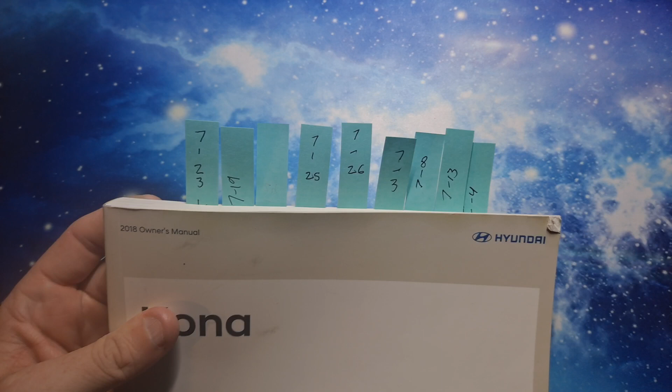So engine coolant, which everybody tells me they can't find anything about, actually has a lot of pages. Some of these are diagrams. Some of these are specifications for when you actually need to change it, and under what conditions, between both engines.

Now, this is for the US, so refer to your manual in your country for your vehicle. That's important. And just about everybody has one.

If you don't have one, you can go to a dealership and get them for free. Most places, at least in the US, you could usually get it for free. Or even Amazon sells them. They range between, I think, $15 to $45, depending on the model. I think that's just because of how rare some of them are, like the 1.0s. There's one in there for the 1.0 for $55. I think it was the highest I've seen, but it's few and far between anywhere near that range.

So today we are going to talk about coolant. So let's take a look.

All right, step one is to open up the back of the book and look for the index. It starts on like I2. So we're going to look for coolant, which I have marked here. I4 is the actual page I have to go to, which is this one.

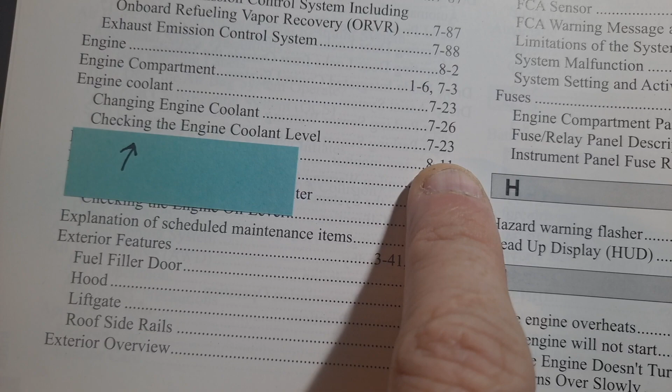Engine coolant on page 7-3. Changing engine coolant on 726. And checking engine coolant level, 723. But that's only 3 pages, and I have 8, 9 tabs? So there must be more involved.

So let's take a look. I'll start in the front and work our way back. Let's see, what's the first one here? I think 7.3 is the first one. Yes, 7.3 is the diagram of the engine compartment.

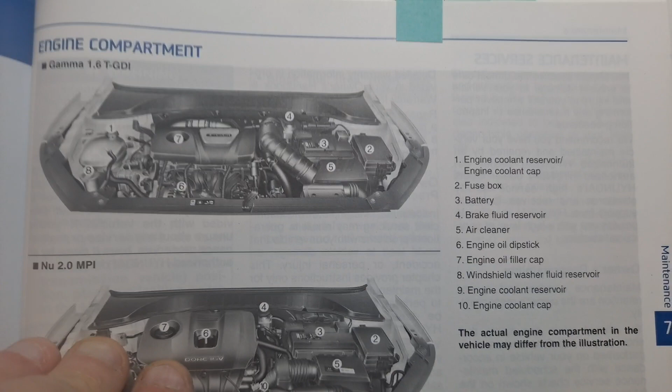Sorry, I'm shaking. The reason I am not a surgeon. Engine compartment on the 1.6. Your coolant reservoir is right there. It says, number 1, engine coolant reservoir and engine coolant cap.

But you notice strangely enough, on the 2.0, number 1 isn't there at all. Because number 9 is the engine coolant reservoir.

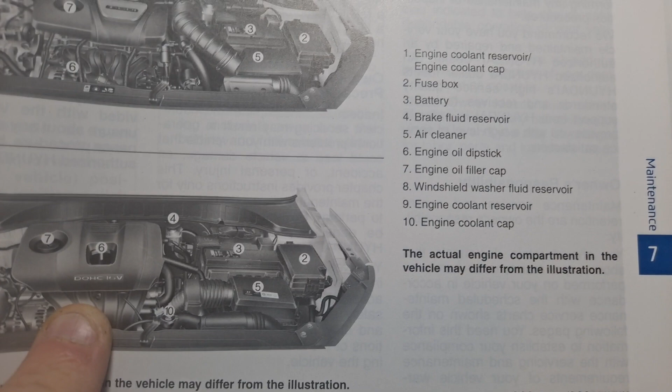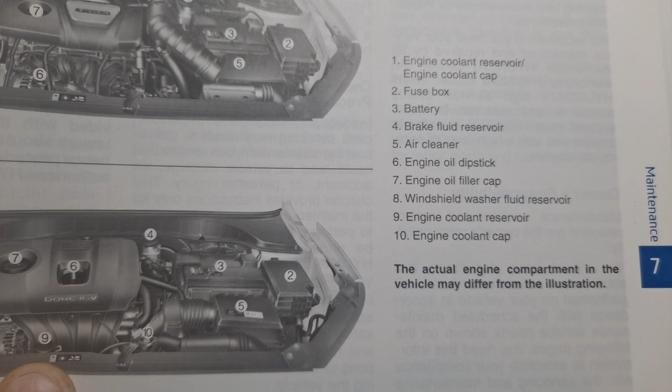So this is where it gets interesting. Number 1 is a reservoir, but it's got a line going in and a line coming out, and a pressurized cap. Where the 2.0 has a radiator cap on the top radiator hose. And number 9, even though it says engine coolant reservoir, is actually an overflow jug or overflow tank.

So this one's got some special requirements, and everybody that has the 2.0 struggles to figure this out. But I will explain. All right.

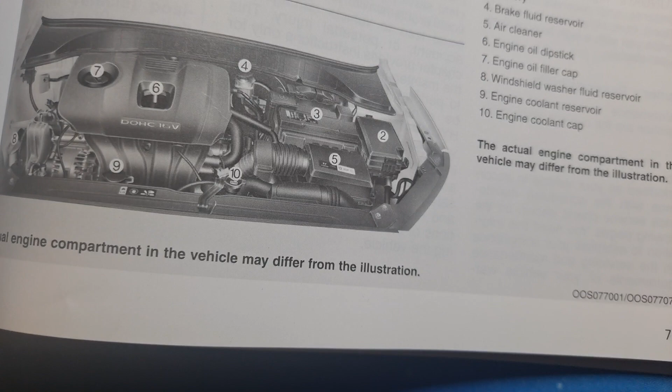So let's see, 719 looks like it's going to be the next page. What do we have here? Oop, 19, where's 19? Oop, I got even more here. Sorry, apparently I was not prepared for this.

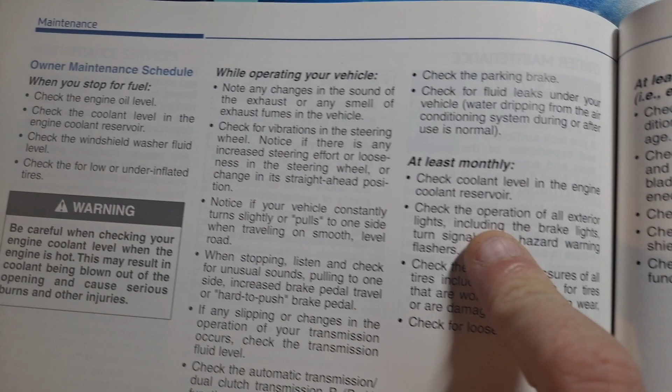They recommend for regular maintenance, at least monthly, check coolant level in the engine coolant reservoir. So you're supposed to check it every month. Do people do that? No.

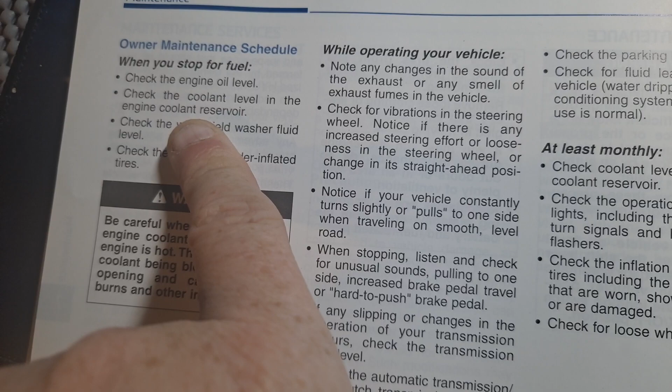They also recommend in the owner's regular manual, when you stop for fuel, check the coolant level in the engine coolant reservoir. I know nobody does that. Not even me. And I check my vehicle every time I do an oil change. I go through and check every little item. So here's that. I really should put these in order, but I guess I didn't do that this time.

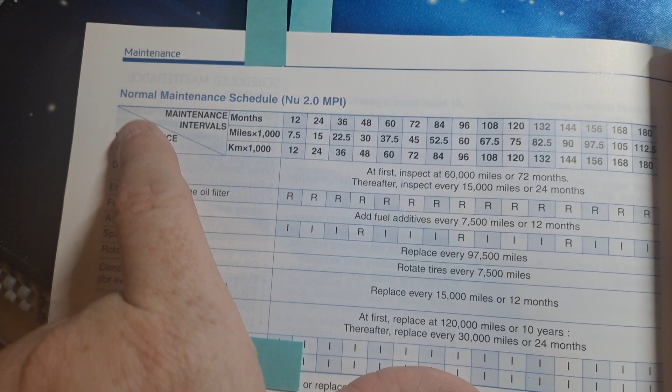All right, so we'll start off with the maintenance schedule. Normal maintenance schedule for the 2.0. Engine coolant: at first, replace at 120,000 miles or 10 years. Thereafter, replace every 30,000 miles or 24 months. That means whatever comes first. So 120,000 miles on your coolant.

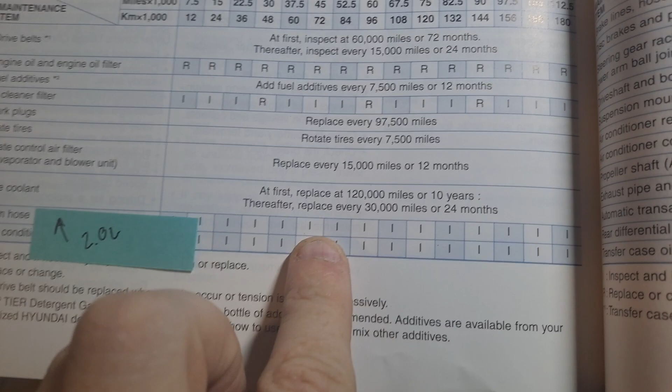That's crazy. I check mine every year. Actually, I change mine every year. But again, I'm modified and I have the 1.6, so this doesn't apply to me.

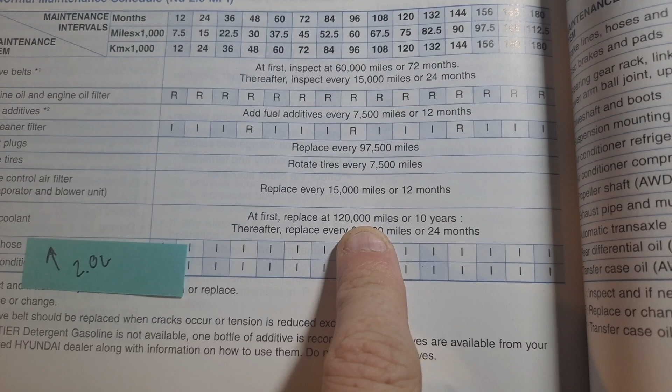So that's interesting. 120,000 miles or 10 years, whichever comes first. So if you did 120,000 miles in the first 8 months of ownership, then I'd have to change it. But I would never go to 120,000 miles because by then it's probably pretty cruddy.

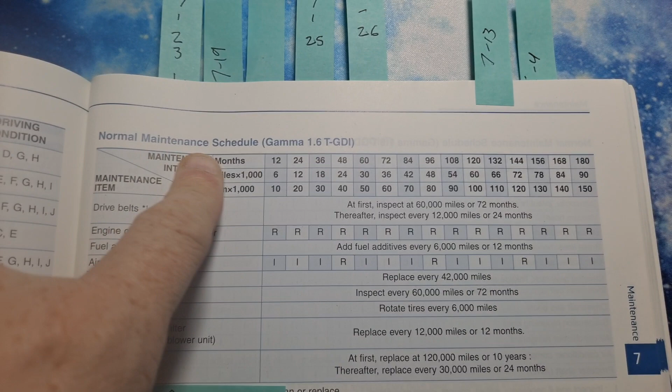All right, so that's on the 2.0. Now on the 1.6, normal maintenance schedule, gamma 1.6. Engine coolant's way down here now. At first, replace at 120,000 miles or 10 years. Thereafter, replace every 30,000 miles or 24 months. Same thing as the 2.0.

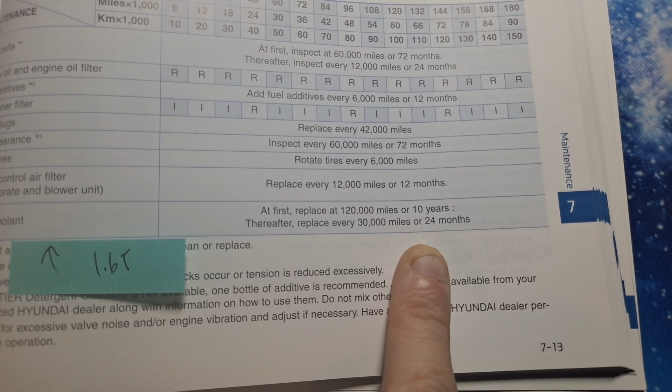Do I recommend it? No, because you have a turbo, and the turbo is both oil-cooled and engine coolant cooled, like radiator fluid cooled. Because of the turbo, it's going to be going through a lot more cycles of hot and cold. I would recommend changing much sooner than that, but that's just me.

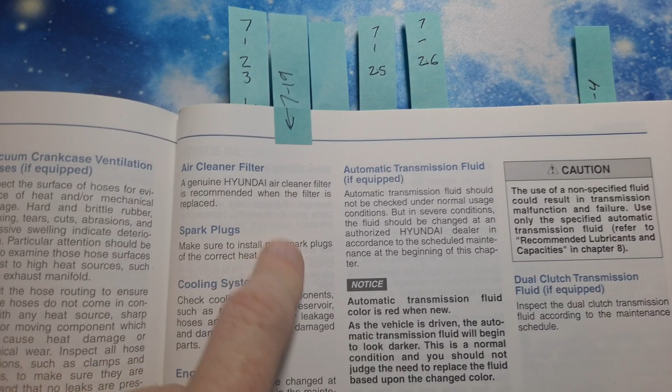All right, let's see what's next. 719, cooling system. Check coolant system components such as the radiator, coolant reservoir, hoses, and connections for leakage and damage. Replace any damaged parts. So this is in regards to explanation of scheduled maintenance items.

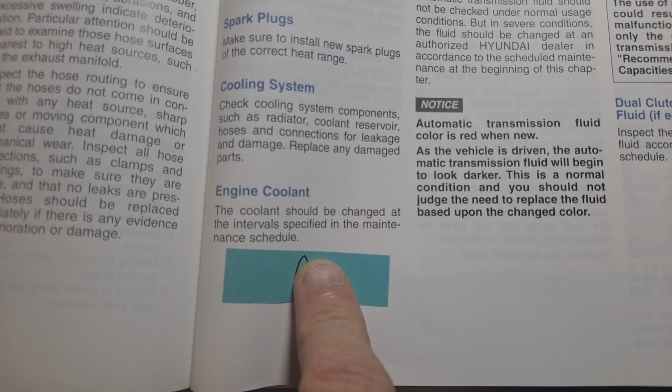And engine coolant. The coolant should be changed at the interval specified in the maintenance schedule, so 120,000 miles or 10 years. And then, how you go after that. Next page. Let's see here. Here we go, 724. Do I have a 720? Oh, here we go, 723.

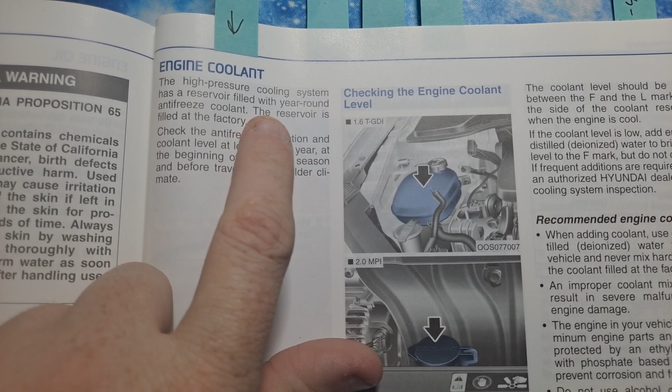Engine coolant. The high pressure cooling system has a reservoir filled year-round with antifreeze coolant. The reservoir is filled at the factory. Check the antifreeze protection and coolant level at least once a year at the beginning of the winter season and before traveling to a colder climate.

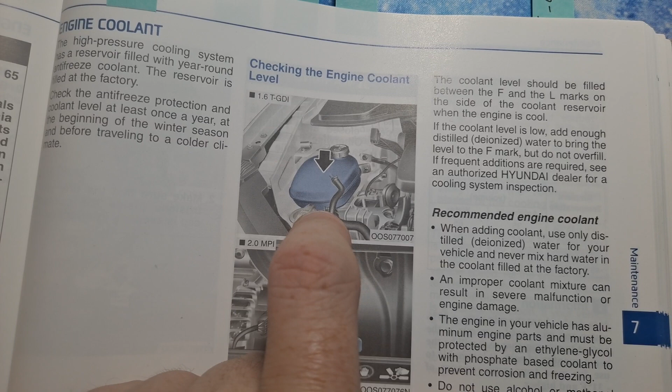Checking the engine coolant level. On the 1.6, there'll be a minimum and maximum, or a low and high mark in it. Mine's not there because I have a different kind of tank. I use a swirl tank in my car, so I cannot show you a picture of it, my apologies. On the 2.0, there's this little cap here that kind of looks like a washer reservoir, but it's not.

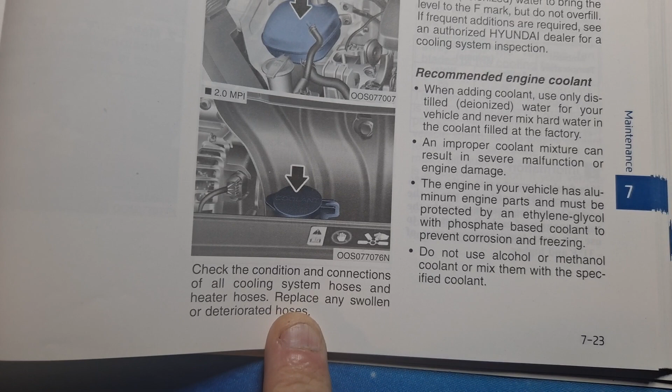It's your coolant. So check the conditions and connections of all cooling system hoses and heater hoses. Replace any swollen or deteriorated hoses. The coolant level should be filled between the F and the L, full and low, marks on the side of the coolant reservoir when the engine is cool, not hot. Hot can possibly burn you, and you do not want to do that because it is pressurized.

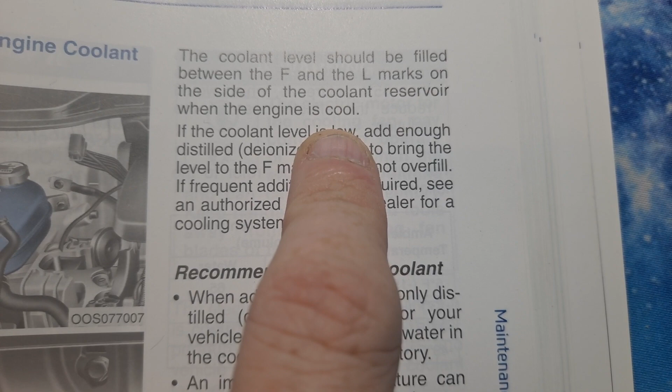On the 1.6 it's at least in that container. The 2.0 is at the reservoir cap, the radiator cap. You'll notice the caps are quite a bit different because this on a 2.0 is not a pressurized cap. The radiator cap on the 2.0 is separate. It's on the top hose, top radiator hose.

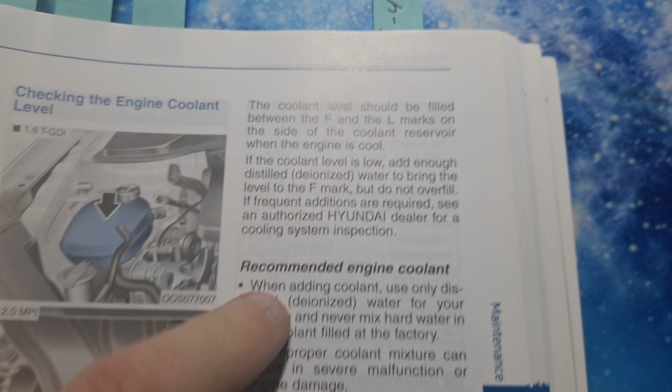If the coolant level is low, add enough distilled, deionized water to bring the level to the F mark, which means full. Do not overfill. If frequent additions are required, see your Hyundai dealership for a cooling system inspection.

Distilled, not regular water, but distilled. Deionized is the same thing. Distilled water is pre-boiled.

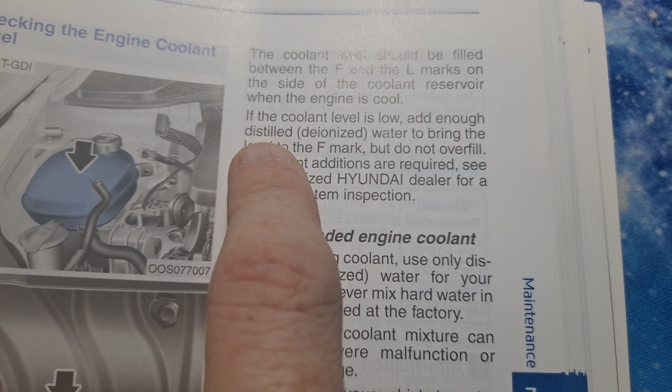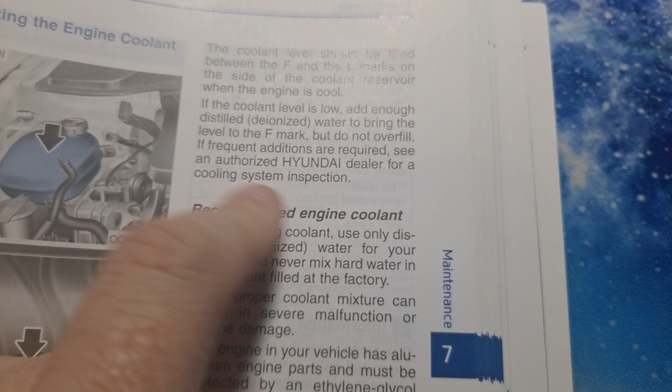So what does that mean? Water boils at 212 degrees Fahrenheit. But water also contains minerals - calcium, magnesium, phosphorus - there's actually a bunch of other stuff, and I can't remember what they all are off the top of my head. When you distill water, you're purifying it by boiling it. When you boil it, it condenses, turns into a vapor, and condenses into another container, leaving all the minerals behind. So you don't want the minerals in your cooling system because it wears things out, especially plastic parts.

So distilled, that's those weird gallon bottles you find at a supermarket for like 99 cents on the bottom shelf that you're not supposed to drink. Well, this is what it's for. They use them in batteries and in cooling systems.

There are other options to this, which are cost prohibitive for most people and more labor intensive, like Evans waterless coolant. That's what I use. That has no water in it.

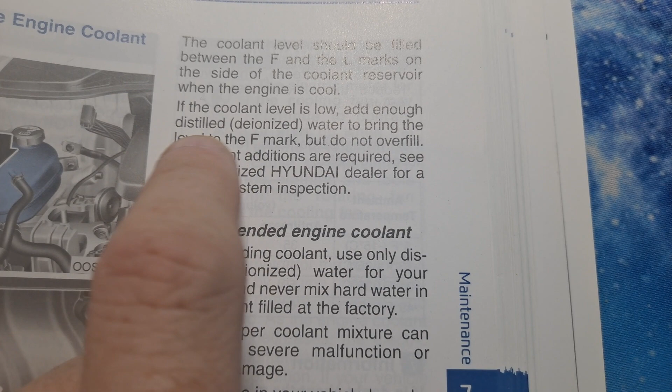But if you do, you got to use distilled water. Recommended engine coolant: when adding coolant, use only distilled or deionized water for your vehicle, and never mix hard water—tap water or garden hose water—with the coolant that's filled in at the factory. An improper coolant mixture can result in severe malfunction or engine damage.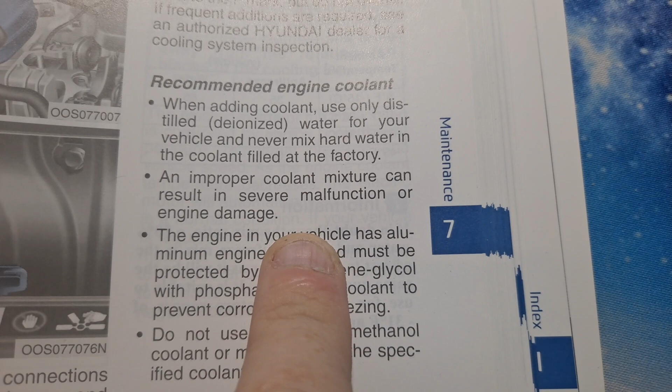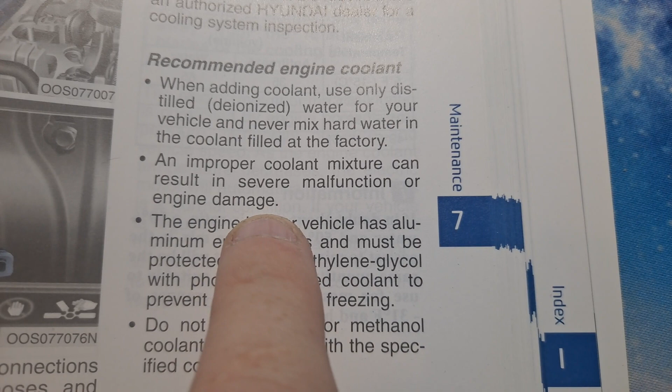What does that mean? Wrong coolant will prevent you from getting heat in the car because it has to go through your heater core, and if you don't get the temperature or the kind of water right, you're not going to get any heat inside the car. It also means you can adversely affect the engine coolant. Too little temperature change for cooling of the engine block can result in poor fuel economy, poor performance, and possible engine damage.

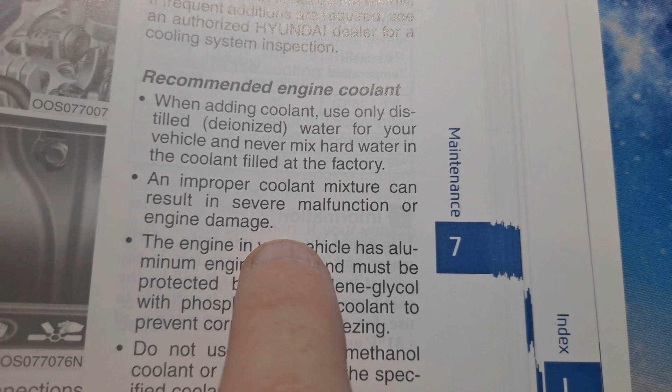Also, on the opposite side, too much water or the wrong coolant could make the engine overheat and seize. So you can do all sorts of damage if you use the wrong kind of coolant mixture.

The engine in your vehicle has aluminum engine parts and must be protected by an ethylene glycol with phosphate-based coolant to prevent corrosion and freezing. Most engine coolants are ethylene-based—there'll be an ethylene glycol base with a phosphate base to prevent corrosion and freezing.

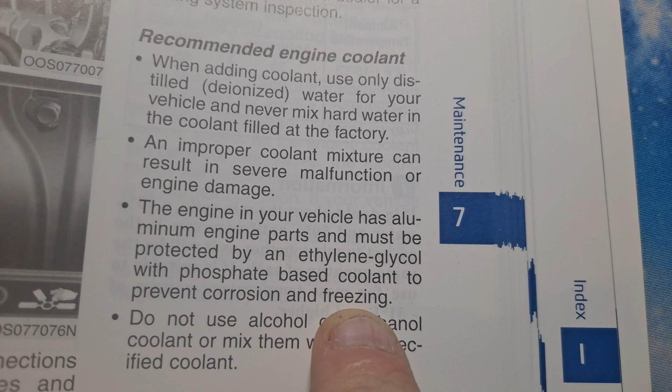So your Prestone yellow bottles, the Valvoline yellow or green bottles—sorry, not the orange. Orange is Dexcool, which is GM. Do not use Dexcool at all, or you'll void any warranty on your cooling system.

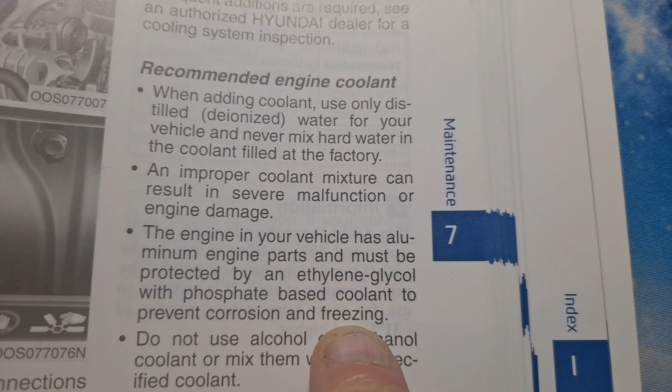Dexcool was used for GM vehicles, and it was garbage. It would eat the seals in the intake manifolds, shorten the life of the head gaskets, and cause all sorts of damage. Plus, if you mix Dexcool with regular antifreeze, you create almost like a glue or molasses in your cooling system, and it would do all sorts of damage.

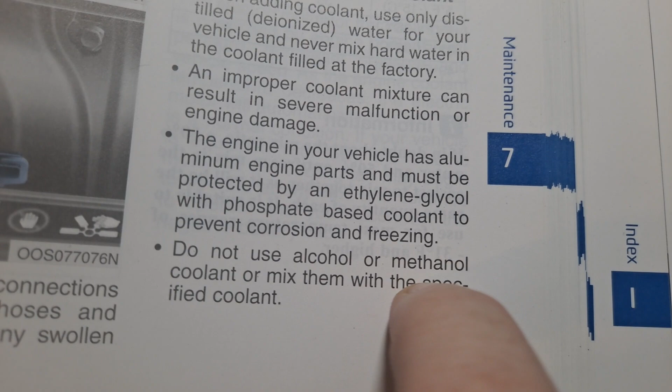Do not use Dexcool. Do not use alcohol or methanol coolant, or mix them with the specified coolant. So don't use a Dexcool product or methanol—you don't find that often unless it's like a diesel, which would use an alcohol or methanol type. But on the 1.6 and 2 liter, you're not going to use it in this.

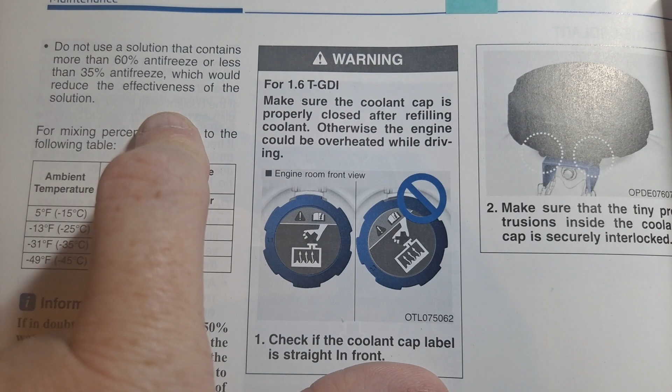Do not use a solution that contains more than 60% antifreeze or less than 35% antifreeze, which would reduce the effectiveness of the solution—that's true. That's why 50-50 is recommended. If you're out in the desert, you could run straight distilled water, but the antifreeze actually helps you have a higher boiling temperature as well.

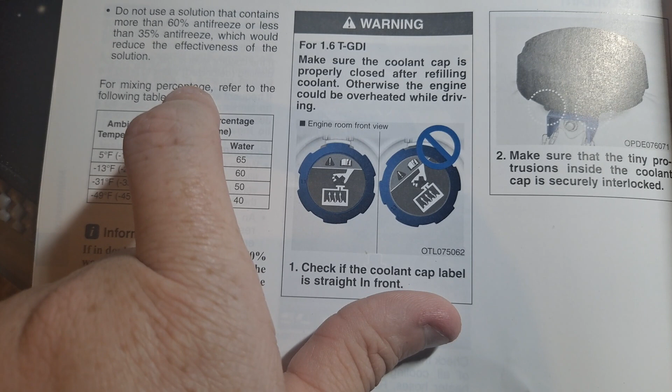It also has a lot to do with the radiator cap. The higher the PSI rating on the radiator cap, the higher the boiling point allowed for the water in the radiator. However, if the system isn't designed to handle a higher pressure radiator cap, something will explode—you'll spring a leak in one of the hoses or a line or something.

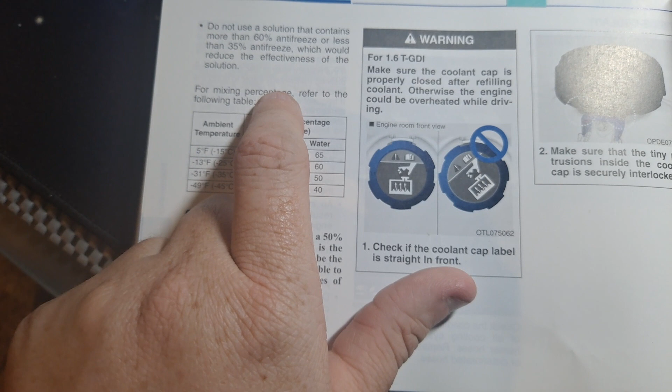That was a common thing with the Nissans, where the Sentras and the Altimas would use the GT-R radiator cap. The Sentra on the 2.5, the Spec V and SE-R, could handle it without a problem. But the Altima with the same kind of engine had problems because the system wasn't designed for a 22-pound cap—it would spring a leak and make a mess.

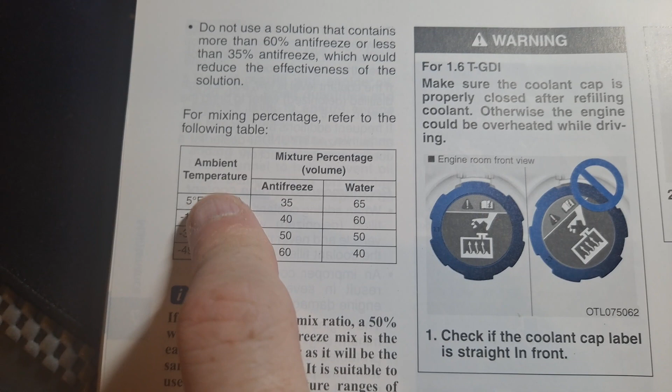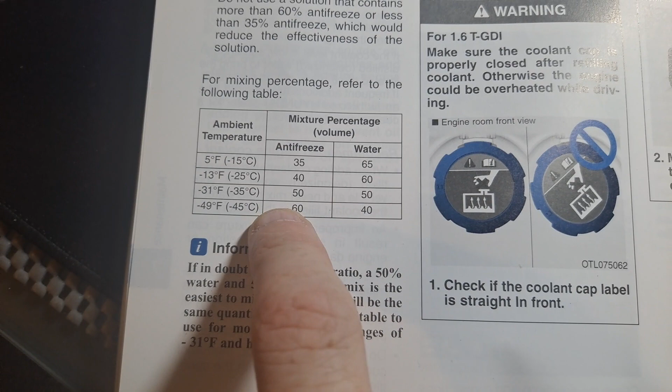It's also the easiest to calculate. If in doubt about the mix ratio, a 50% water and 50% antifreeze mix is the easiest to mix together, as I just said, with the same quantity of each. It's suitable for use in most temperature ranges of minus 31 degrees Fahrenheit and higher.

Warning: for the 1.6 turbo GDI, make sure the coolant cap is properly closed after refilling coolant, otherwise the engine could overheat while driving. So they're telling you, pretty much, make it straight—see where this is, make it straight, check if the coolant label is straight in the front. It actually locks in that way.

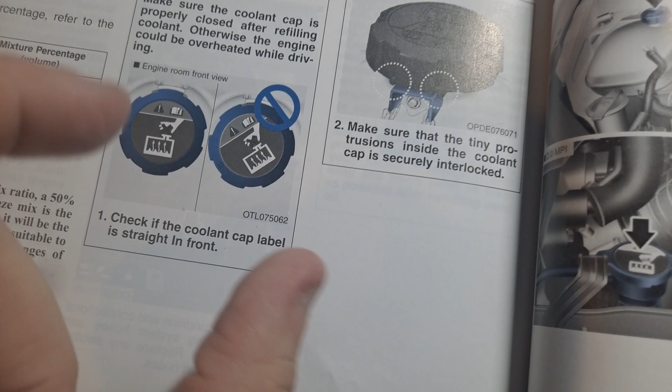If you don't lock it in, you could blow the cap off the top and get boiling hot coolant all over your engine compartment. Ask me how I know.

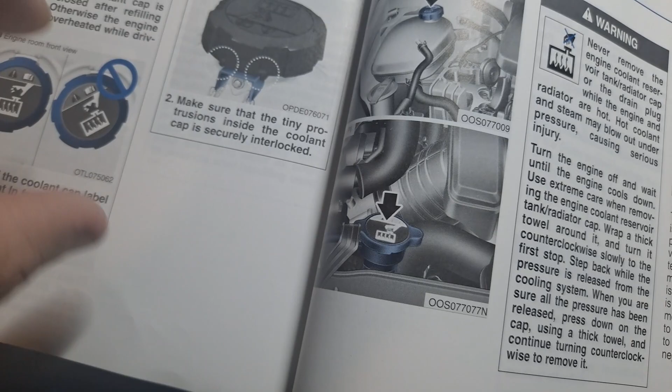Make sure that the tiny protrusions inside the coolant cap are securely interlocked. There's these tiny little knobs on the side that actually lock into place. You should feel and hear an audible click when you lock it in place. All right, so that's that one.

On the 2.0, your coolant goes in at the top radiator hose, because that uses an actual radiator cap, while the 1.6 does not, but there's both pressure caps. They're just different designs. Warning, never remove the engine coolant reservoir tank, radiator cap, or the drain plug while the engine

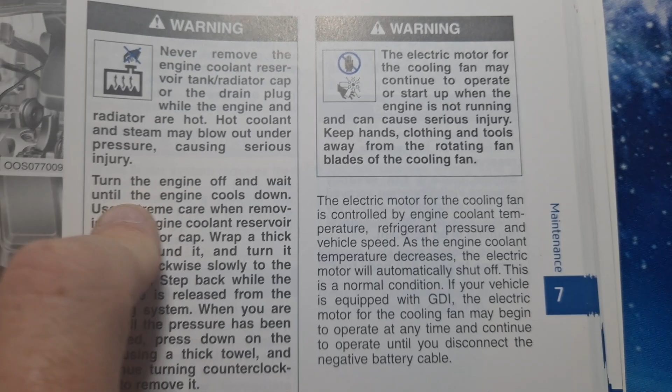and radiator are hot. Hot coolant and steam may blow out under pressure, causing serious injury, most notably burns - really bad second and third degree burns. So I highly recommend you do not open the caps when it's hot. What do I consider hot? If there's anything on your temperature gauge inside your dashboard, do not open that cap.

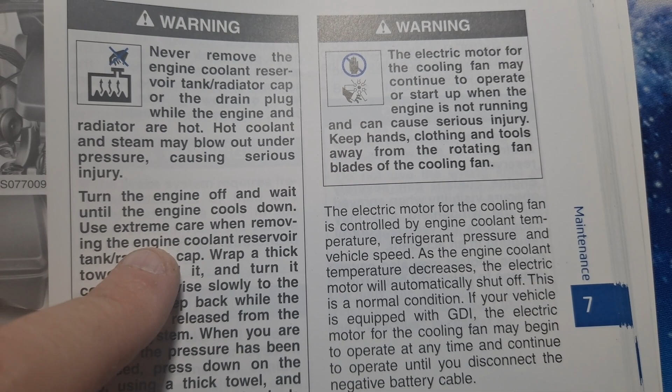So turn the engine off and wait until the engine cools down. Use extreme care when removing the engine coolant reservoir tank or radiator cap. Wrap a thick towel around it and turn counterclockwise slowly to the first stop. Step back while the pressure is released from the cooling system. When you're sure all the pressure has been released, press down on the cap using the thick towel and continue turning counterclockwise to remove it.

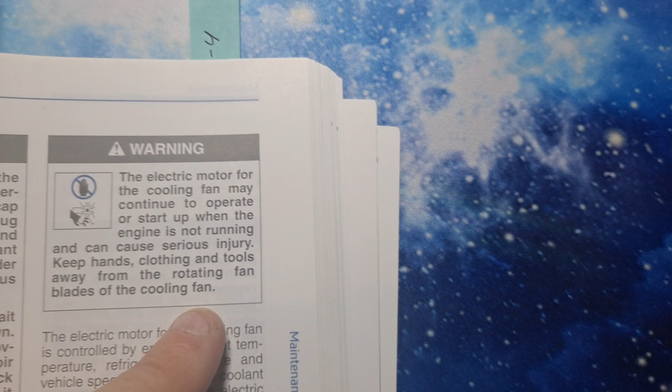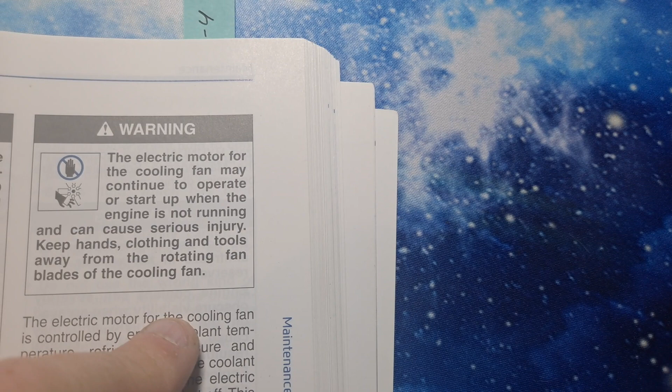Warning, the electric cooling fan may continue to operate or start up when the engine is not running. A lot of people don't understand this. Especially on the turbo, because it has a turbo timer set into it, that fan can turn on and off anytime it wants. Keep hands, clothing, and tools away from the rotating fan blades of the cooling fan. In order to turn it off, you either have to disconnect the battery or pull the fuse. Just remember to replace it before you decide to start the car again.

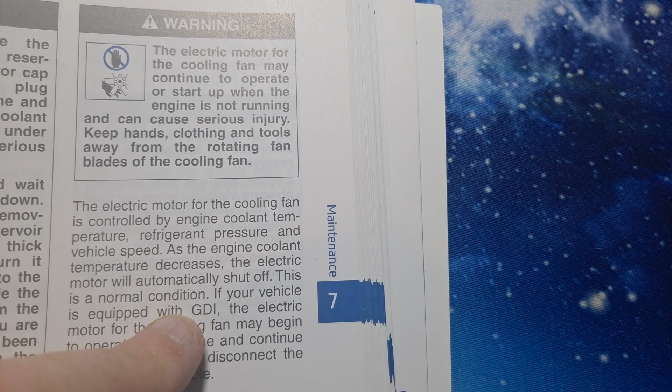The electric motor for the cooling fan is controlled by engine coolant temperature, refrigerant pressure, and vehicle speed. As the engine coolant temperature decreases, the electric motor will automatically shut off. This is a normal condition. If your vehicle is equipped with GDI, gas direct injection, the electric motor for the cooling fan may begin to operate at any time and continue to operate until you disconnect the negative battery terminal. So it's important to understand. Now that's on the 1.6.

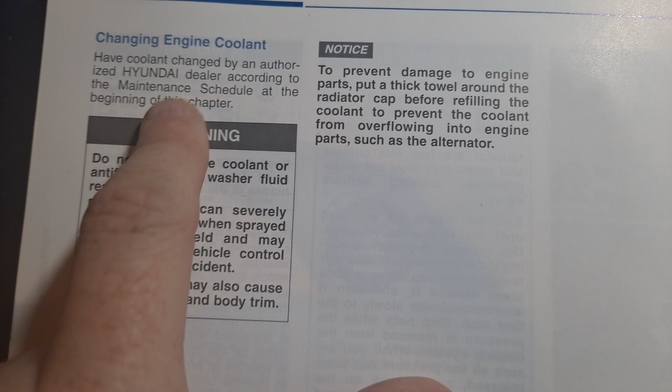The 2.0 is going to be a little bit different. For changing the engine coolant, they say have an authorized Hyundai dealership do it, blah blah blah. I don't recommend that. For any reason you can't go to the dealership, I applaud you. I'm not a fan of the dealership. They have screwed my car up so many times in such bad ways that a lawsuit was involved. So we're not going to go through that at all.

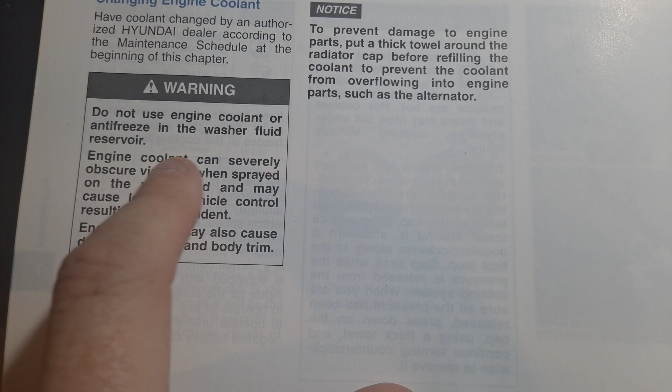Again, warning, do not use engine coolant or antifreeze in the washer fluid reservoir. You would be surprised how many people with a 2.0 do that, where they cannot tell the difference between a blue cap and a black cap. Blue is washer fluid, black is coolant.

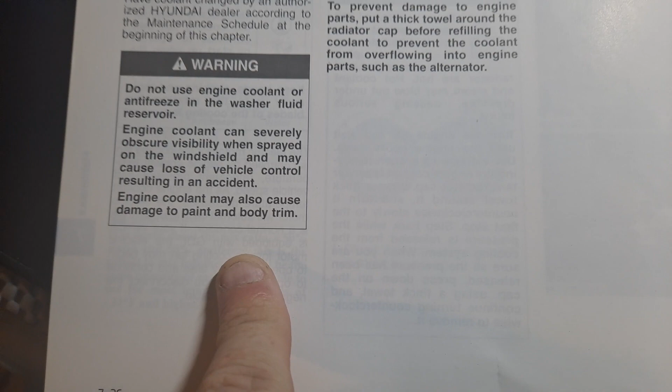Engine coolant can severely obscure visibility when sprayed on a windshield and may cause loss of vehicle control, resulting in an accident. Yes, coolant on a windshield will smear like dead bugs across the windshield, and you're not going to be able to get it off that easily. Plus, it's going to smell not particularly great, and it can kill you that way as well.

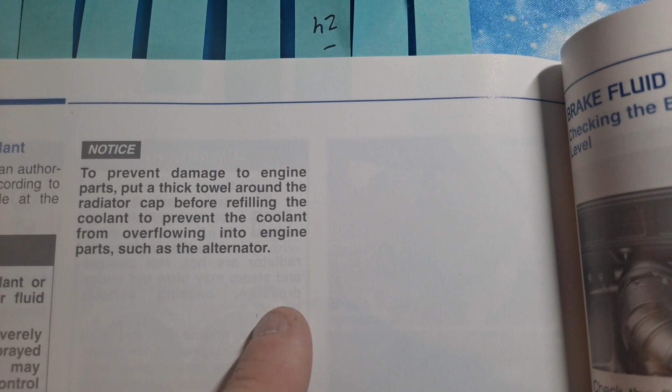Engine coolant may also cause damage to paint and body trim - it'll peel paint. To prevent damage to engine parts, put a thick towel around the radiator cap before refilling coolant to prevent coolant from overflowing onto engine parts such as the alternator. So, yeah, just basic precautions.

All right, let's see, what do I have left here? Okay, so I'm going to the specifications page. I thought I had another page left to explain the difference between the 1.6 and 2.0 reservoir, but I cannot find it at the moment.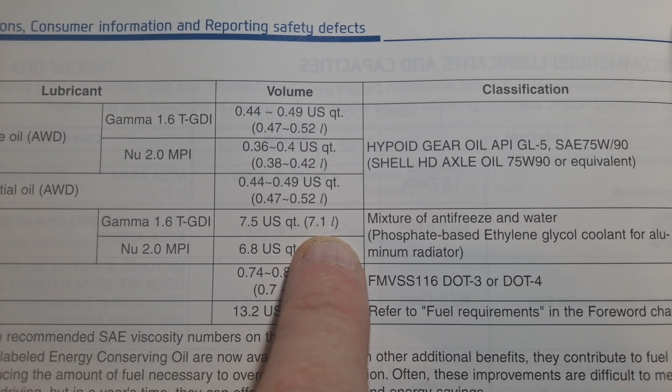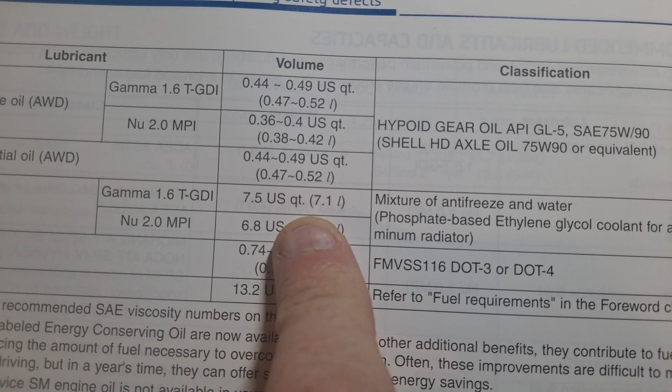So I looked up the specifications on page 8.8, which wasn't even listed in the back, but it's in here. Lubricant, coolant. The 1.6 gamma uses 7.5 US quarts, or 7.1 liters. On the Nu 2.0 non-turbo, it's 6.8 US quarts, 6.5 liters. Now do you realize that? The 1.6 is a smaller engine but uses more coolant because it's turbocharged. So the turbo requires more coolant. We also have a larger radiator.

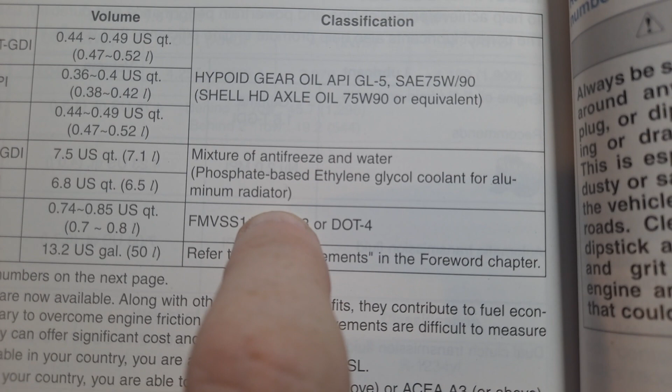Classification: mixture of antifreeze and water, phosphate-based ethylene glycol coolant, aluminum radiator. Yes, your radiator in your vehicle is aluminum, not copper, not brass, not plastic. It's got plastic tanks, but it is an aluminum radiator. So don't try hitting it with anything, because you could possibly break it.

So I'm going to go back to the front page and try to explain to you what the difference is between the 1.6 and the 2.0 coolant reservoir. On the 1.6, the coolant reservoir is up here on the passenger side, with two hoses going to it.

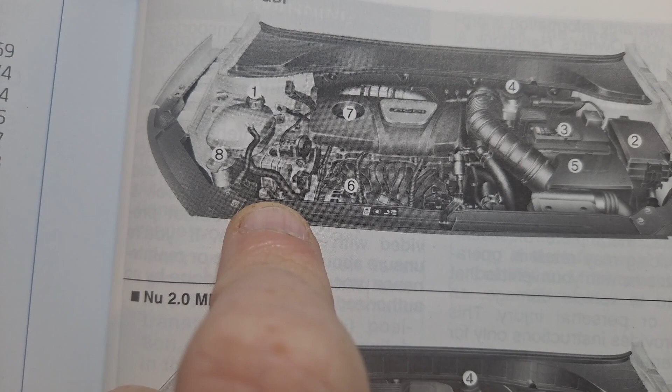Actually, might have three in this case. Let me see—nope, two, because the other's a connector on the back.

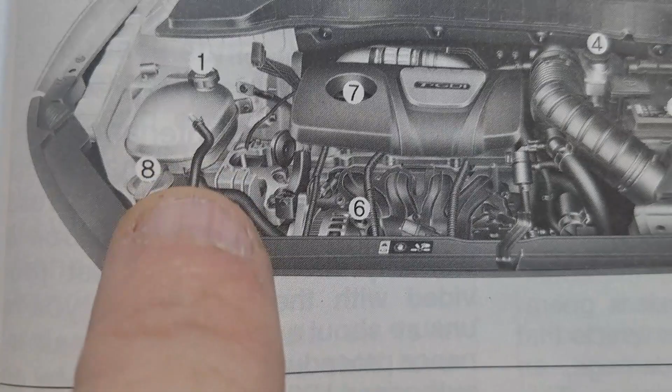So you have a line coming off the intake manifold. It comes right in the middle of the intake manifold to the bottom of the coolant jug, and then there's one on top that goes back to the radiator. This is effectively known as a swirl tank or burp tank, sometimes a puke tank—all different names for this. It's got an air release at the top, and on the other side of the cap there's a tiny little question-mark-shaped thing so air can get burped out of the system.

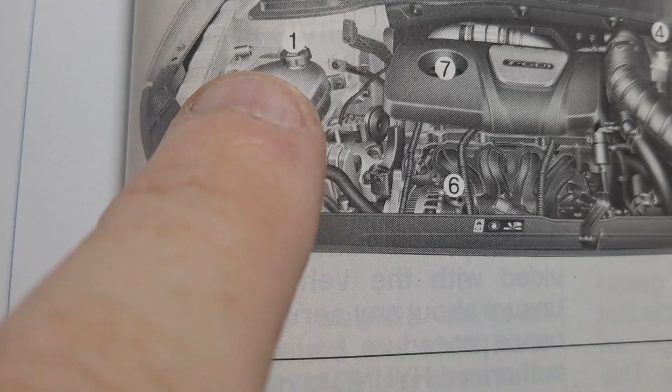As coolant runs through it, it actually spins on the inside, almost like a toilet trying to drain. So the coolant spins, releasing the air out of the system—it automatically burps the system. It's not perfect because there are coolant lines that are higher up. They're actually down here, but there's some in the back that are higher up that go into the turbo.

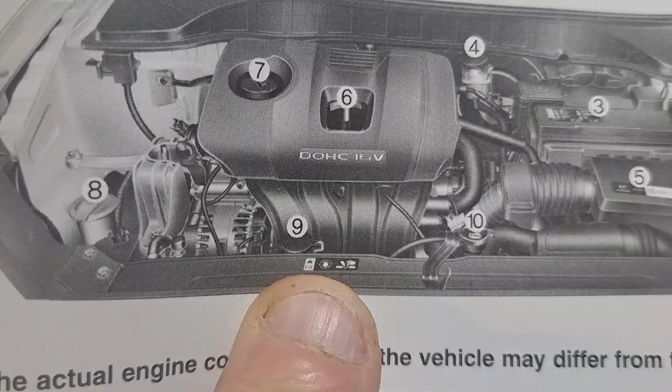On the 2.0, this one here is a coolant tank. Now, what do I mean by tank? Well, it's an empty container. It's got a high and a low mark on it, but all it is, is an overflow from the radiator. So here's the line that comes off and goes into that bottle—that's all it is, an overflow.

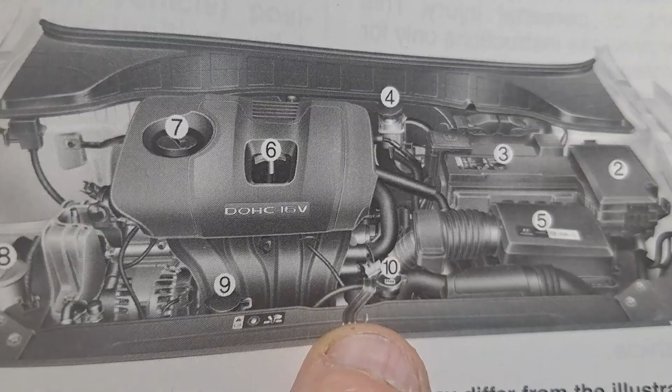During the operation of a car, the temperature heats up, the coolant expands because water expands when it gets hot, and it has to go somewhere. So this cap will actually open up—it'll literally pop up because it's pressurized. It's got a little copper valve on the inside and a spring. It opens up almost like a thermostat, releasing the pressure into the tank.

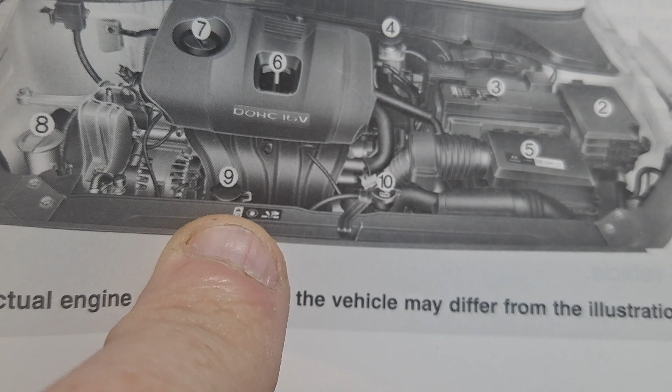Why is it going into the tank? Well, because it's against the law to drop it on the ground. Back in the 70s and 80s you could do that, but it turned out to be an environmental hazard because it pollutes the ground, pollutes the water, pollutes everything. Dogs and cats, small animals are attracted to the smell of the antifreeze and it will kill them.

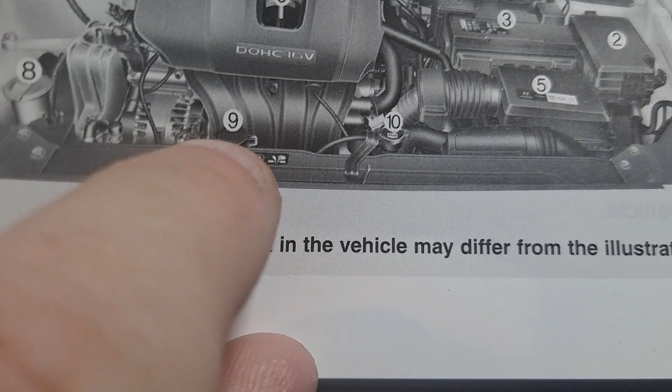So if that's on low or if it's on high, as long as it's not overflowing, then it's fine. If it's literally overflowing out of the top, there's a problem. If the container is empty, it's fine because it's still an overflow tank—it just means the pressure in the cap hasn't gotten high enough to need to open up.

Some vehicles, there's a little bit at the bottom; some vehicles it's high. We see people all the time with the 2.0 top it off to the full mark, and then when they drive, it overflows and makes a mess—again, because it's an overflow tank. So if you have a 2.0, it's an overflow tank. Do not fill it to the full line.

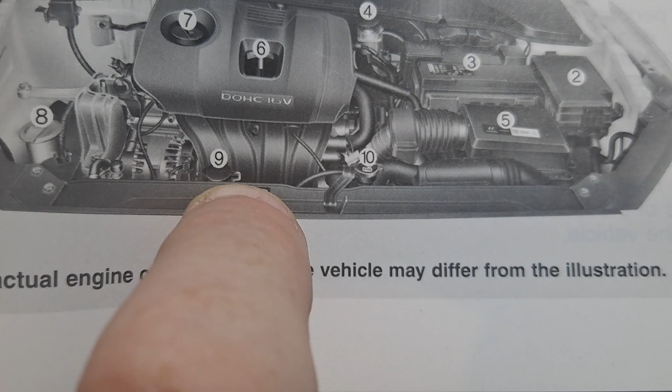If you have the 1.6, you have a swirl tank. It's got two hoses instead of one—one goes to the radiator, one goes to the intake manifold. When the cap opens up, it'll purge it out the side, but it's usually just air. It's kind of like a little one-way valve type thing.

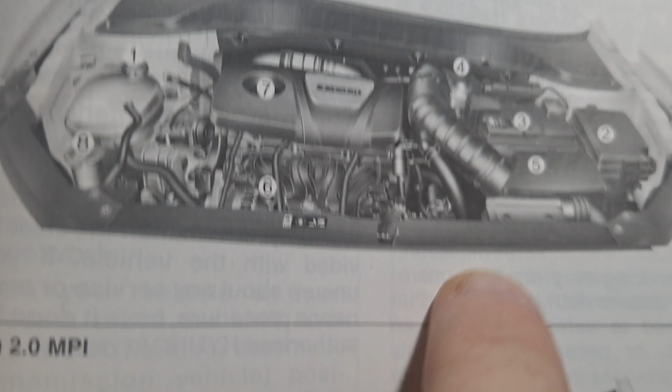The 1.6 does not have a radiator cap, where you have a radiator cap here at the top of the hose, the 1.6 does not have that. You can see it here—there's the hose, but there's no cap there. No pressurized cap; on the 1.6 it's on the tank.

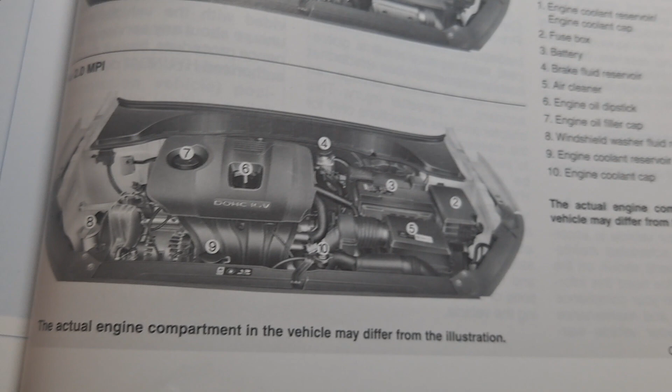So that's how you know pretty much what the difference is between the two. Now you know what kind of fluid goes in it, when you're supposed to change it, and all that good stuff, and how to locate it in your vehicle. All right, so that is it.